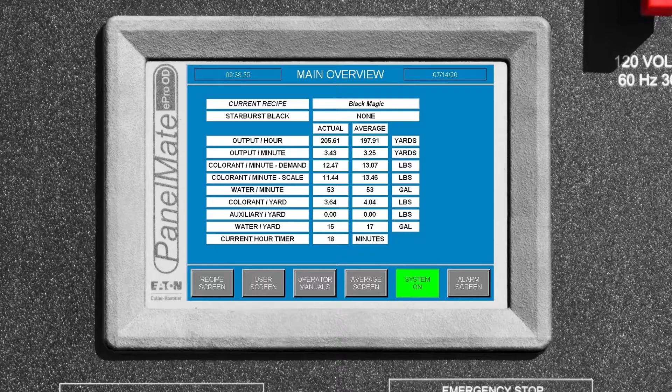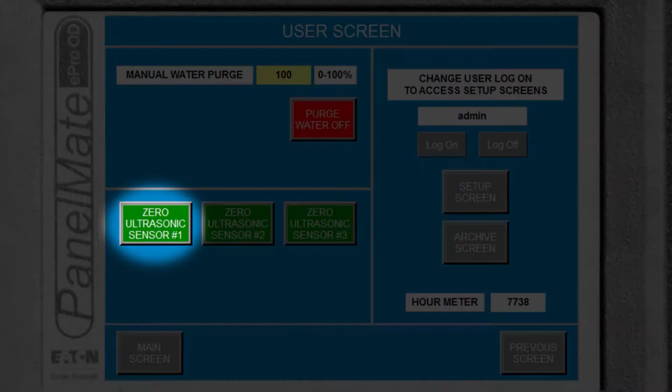Let's get started. First, it's important that the discharge conveyor is stopped and empty of all material. From the main overview screen, press the user screen button. Here, press each of the 3 ultrasonic sensor buttons and hold them for 10 seconds. To check that the ultrasonic sensor has been reset, press the main screen button. The output per hour should now read 0.0 yards per hour.

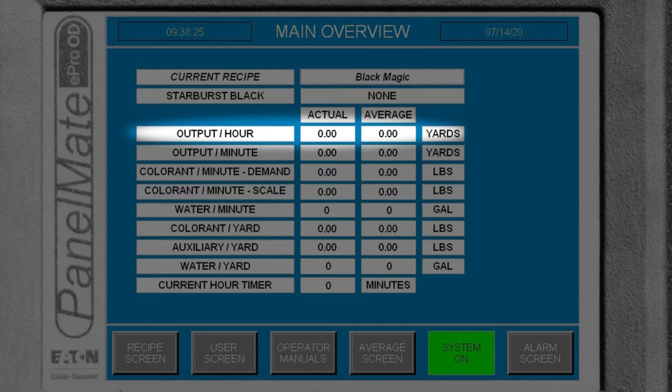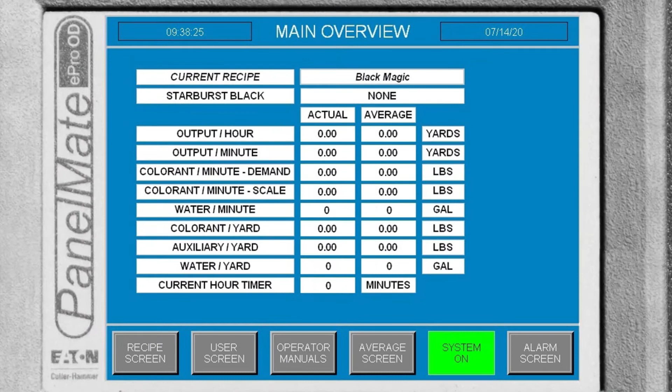If it doesn't, follow these steps. Visually inspect that the conveyor is empty and stopped. Then press the user screen button, and press and hold each of the ultrasonic buttons again for 10 seconds. Press the main screen button to check the output per hour has been reset to 0.0. After the conveyor is started, verify output is 0 yards per hour.

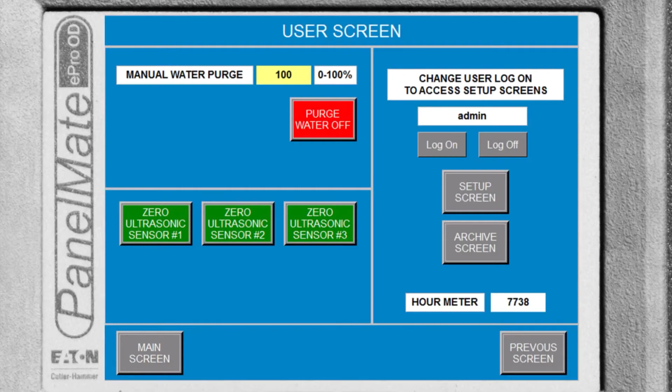Next, it's time to safely start up your Sahara machine. To do this, always follow the Sahara operating procedure for startup, including priming the pumps, priming the water, and filling the Sahara with mulch. When you're done with this, the machine is ready for auto operation by GEM 2.0.

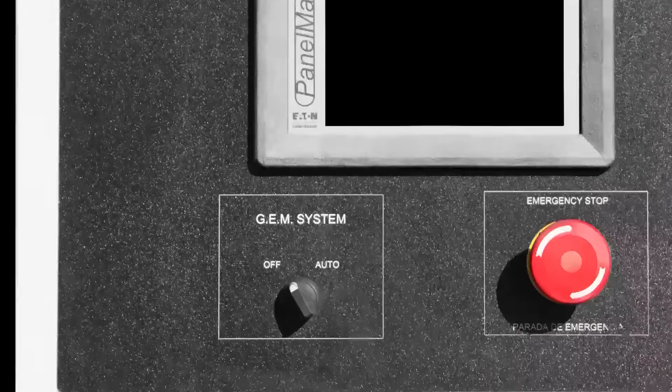On the Sahara control panel, set the auto manual selector switch to auto. Set the scale selector switch to auto. Then set the water selector switch to off. Now over on the GEM control panel, set the GEM system control selector switch to auto and you're set. The Sahara and the GEM system are now ready for automatic operation.

The green light on top of the GEM control panel should be on. If the red light is on, you'll need to correct the fault and reset the alarm. You'll find detailed instructions for how to do this in the Managing Alarms and Faults section of this video. If no light is on, you should check that all selector switches are in the proper position.

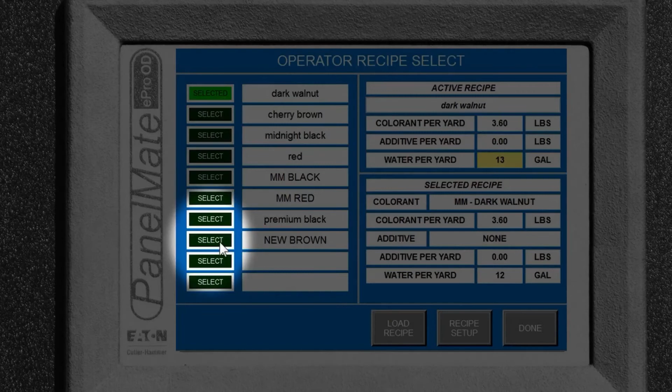Next, it's time to select your colorant recipe. From the main overview screen, press the recipe screen button. You'll be taken to the Operator Recipe Select screen. Note, all operators have access to select recipes. Supervisors or administrators are allowed to set up, create, or change recipes. Press the Select button to the left of the desired recipe. The selected recipe box will now show the selected recipe.

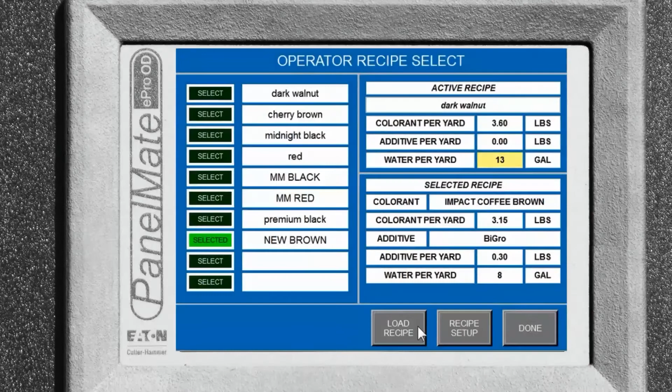Press the Load Recipe button. The selected recipe will now move up to the active recipe box. The selected recipe will also show on the main overview screen.

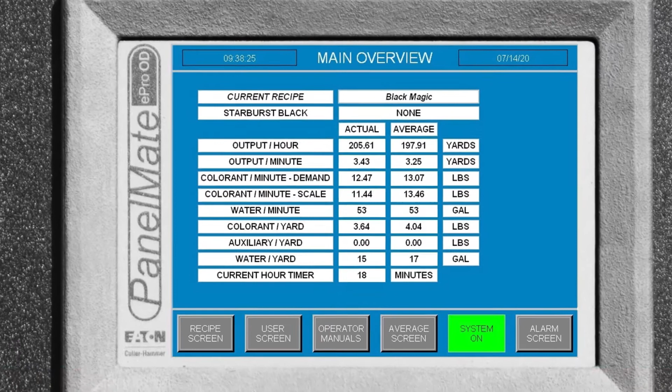Operators are allowed to set or adjust the water per yard. This is the only operator adjustable recipe setting. To do this, from the main overview screen, press the Recipe screen button. When the Operator Recipe Select screen appears, press the yellow area to the right of the water per yard label. Type the water rate you want using the pop-up keypad, then press the Enter key. You should see the amount you entered displayed in the yellow water per yard box.

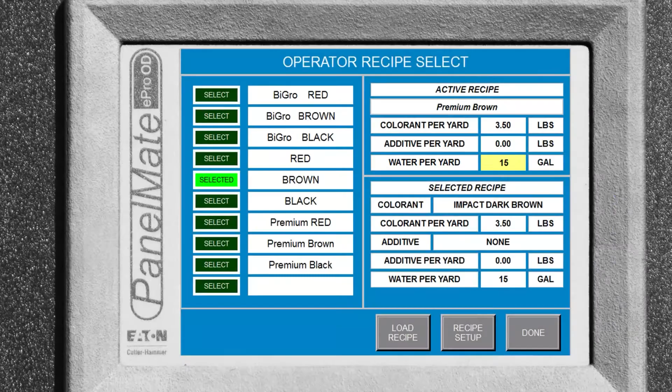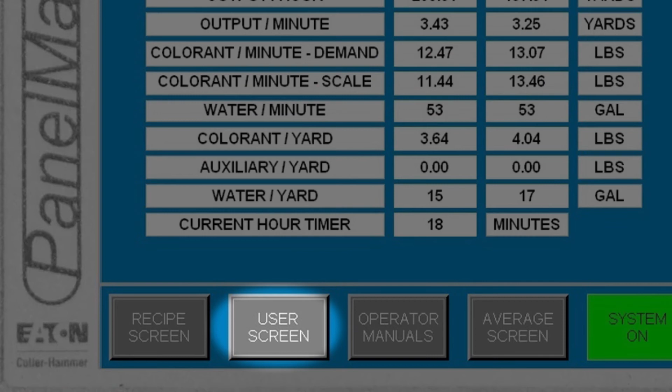To manually open the GEM proportional water valve to clean out or test the water system, start on the main overview screen. Then press the user screen button. Then press the Purge Water Off button. If the valve light glows red, the valve is closed. Press the button to open it. If the valve light glows green, the valve is open. Press the button to close it.

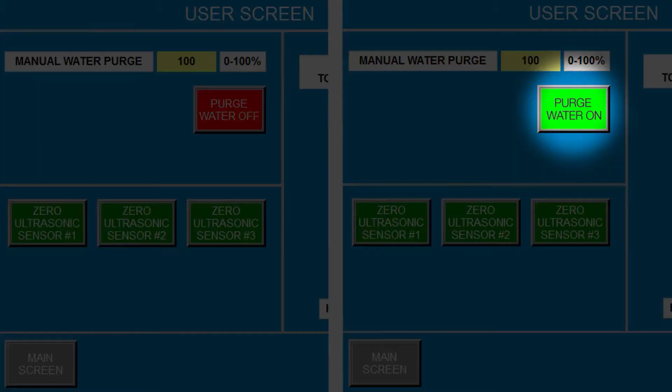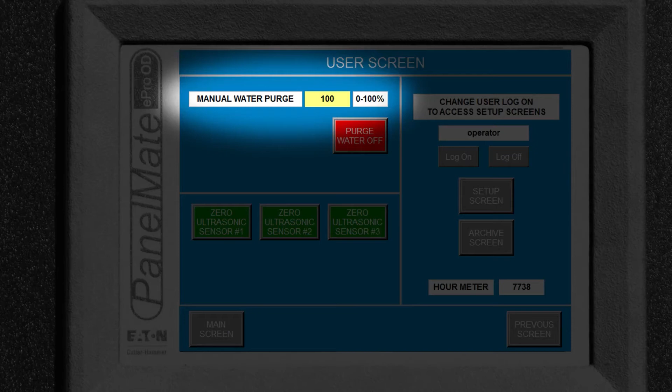Note that the valve will take 5 to 7 seconds to open or close. Allow the valve to cycle 5 to 7 seconds before pressing the button again. Most, if not all the time, the manual water purge setting should be 100%, including cleaning the system at the end of the day or opening the system for cold weather drainage. To change this setting, press the yellow area here and enter the percentage you want using the pop-up keypad.

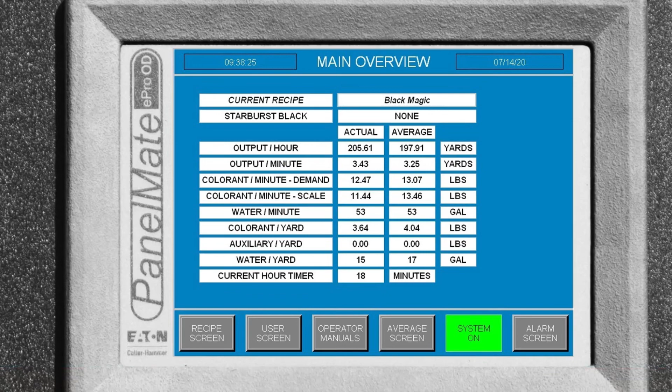If the red light on the GEM control panel is glowing, the GEM is telling you there's an alarm or machine fault that needs your attention. The fault name will be displayed on the main overview screen. Here's what to do. From the main overview screen, press the Alarm Screen button. The Alarm List screen displays the last 4 machine faults. Then press the Reset Fault button. If the fault does not disappear from the list, visually check your Sahara machine for the source of the fault and correct it.

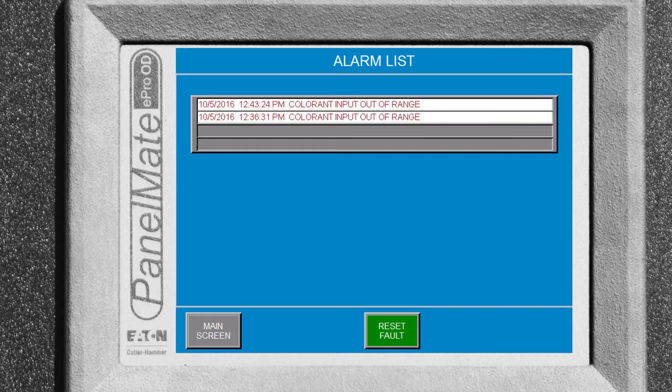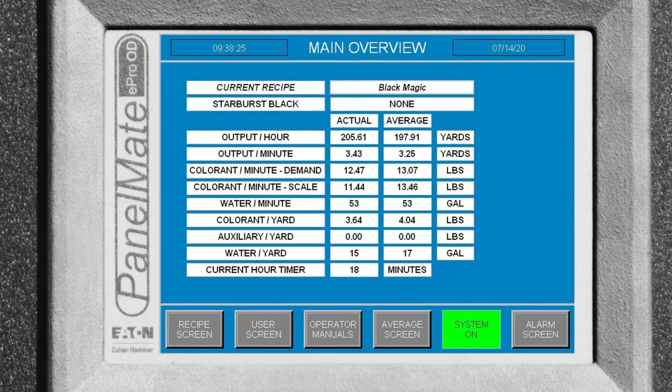Let's say you want to review detailed information about the Sahara stored hourly production averages. Here's how to do this. From the main overview screen, press the Average Screen button. Note that there are 2 screens. The first shows the first 1 to 12 hour averages. Press here to access average hours 13 through 24.

These averages are logged and reported to you via email daily. The GEM 2.0 system automatically archives the information on the average screen and starts to display a new hour at the end of an operational hour or at the change of a recipe. Note that a water per yard change is not a recipe change and will not start a new hour.

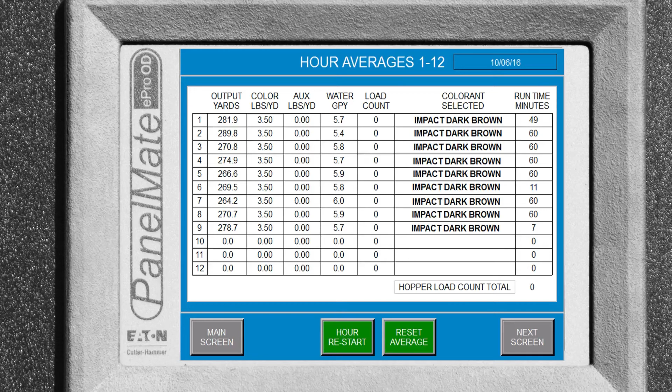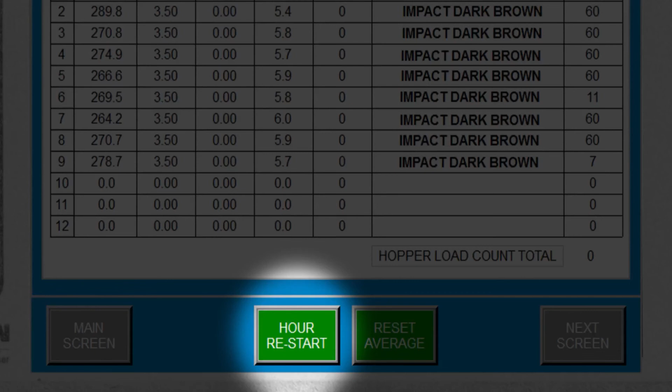You can manually start a new hour by pressing the Hour Restart button. For calibration purposes, the Hour Restart button can be pressed to start a new hour. This will not reset or clear any data. It will just start a new hour immediately.

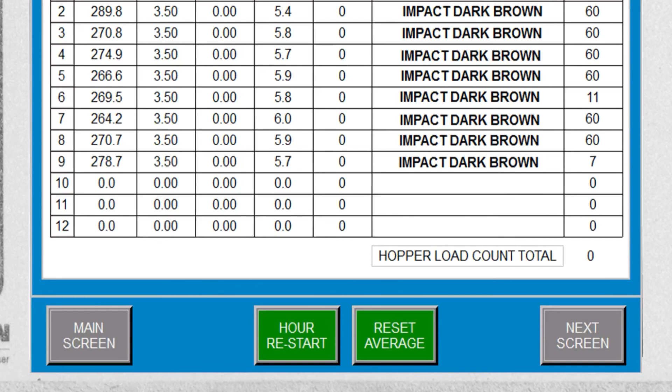The GEM 2.0 will automatically reset the daily average every day. It will download the data and start a new day or reset at 11:50 p.m. The screen can be manually reset by pressing this button, but this is not recommended.

When you're comfortable with coloring your mulch, watch the video on reporting and ordering parts.